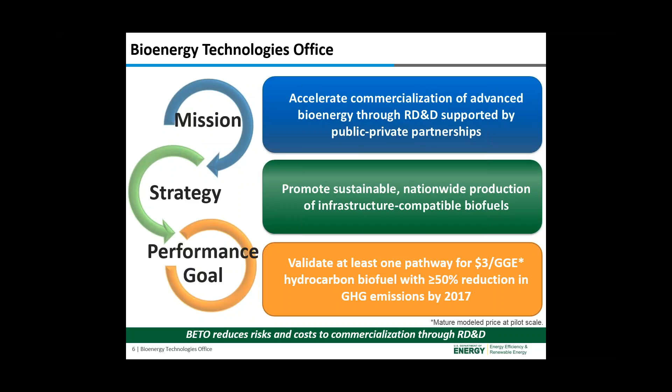So BETO's mission is to support the research and development and demonstration of advanced bioenergy technologies. Our office spans the entire bioenergy supply chain. So feedstock supply efforts focus on RD&D to develop cost-effective integrated logistics systems. So this includes growing, harvesting, collecting, storing, pre-processing, handling, and transporting of quality feedstocks to biorefineries. Our conversion R&D program is focused on developing commercially viable technologies to convert terrestrial and algal feedstocks into liquid fuels, as well as bioproducts and biopower.

Biochemical conversion R&D focuses on pathways for producing sugars and other carbohydrate intermediates, followed by conversion to finished fuels. And the thermochemical conversion R&D is focused on pathways producing bio-oil and gaseous intermediates from biomass, followed by upgrading to finished fuels. And then another category we have is the demonstration and market transformation program that is focused on demonstrating and validating biomass conversion technologies through successful construction and operation of cost-shared pilot and demonstration scale integrated biorefineries.

We also have cross-cutting programs in sustainability and strategic analysis, which proactively addresses sustainability of advanced bioenergy to enhance its benefits, public acceptance, and long-term viability. This program area conducts key analyses to guide planning and portfolio management and provides analytical basis for the R&D prioritization of target development and assessment of progress towards goals.

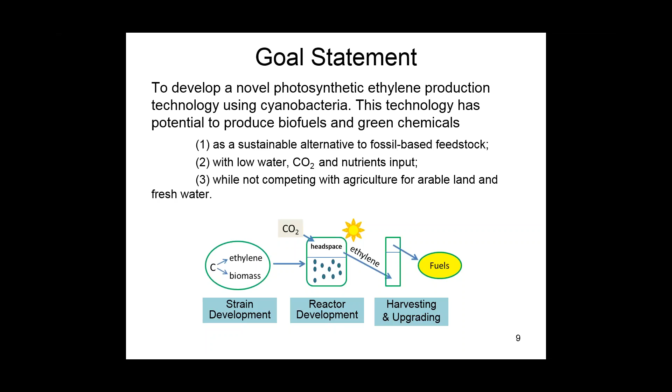So why are we working with cyanobacteria? Cyanobacteria are also known as blue-green algae. They are bacteria that perform oxygenic photosynthesis, converting carbon dioxide to organic compounds. They are primary solar energy converters in diverse ecosystems.

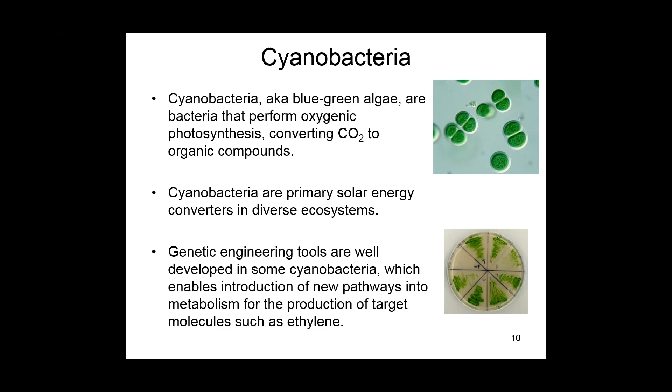They are very robust. And for some strains of cyanobacteria, we have excellent genetic engineering tools that allow us to modify its metabolism to introduce new pathways, produce useful products, such as ethylene, and that allow us to further improve metabolic pathways to make more ethylene. Next.

So why ethylene? Well, ethylene is one of the most produced organic compounds worldwide. It is the feedstock for a wide range of materials and chemicals that include all kinds of plastics. Ethylene can be polymerized into liquid transportation fuels. And currently, at industrial scale, ethylene is produced from fossil resources. So I want to point out that the fossil resources are organic compounds that are derived from photosynthesis that occurred millions of years ago. So more renewable sources of ethylene are desirable. Next.

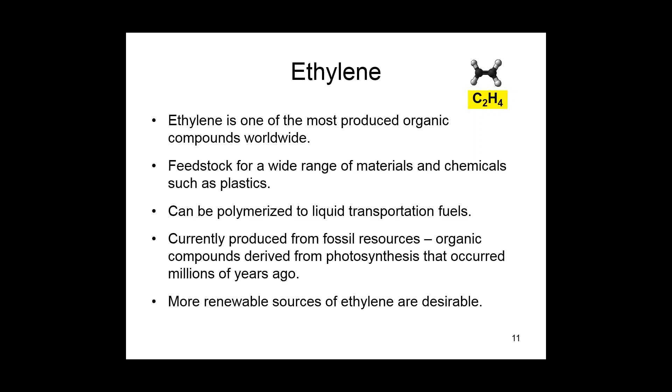Here we look at different ethylene production scenarios. So on the left is the conventional fossil resource-based ethylene production. In the middle is a newer plant bioethanol-based approach. And on the right is what we're working on, cyanobacteria bioethylene.

So in the conventional ethylene production approach, here we show that we start with petroleum, and that's long-chain hydrocarbons. And petroleum can be steam cracked, processed to produce a mixture of short-chain hydrocarbons. And by cryogenic distillation, you will get ethylene and other chemicals.

So in the plant bioethanol approach, first you grow a plant, and that's a CO2 fixing process. So you get plant biomass, and then you process the biomass, and you get ethanol by fermentation. Then by a catalytic dehydration process, you can get ethylene.

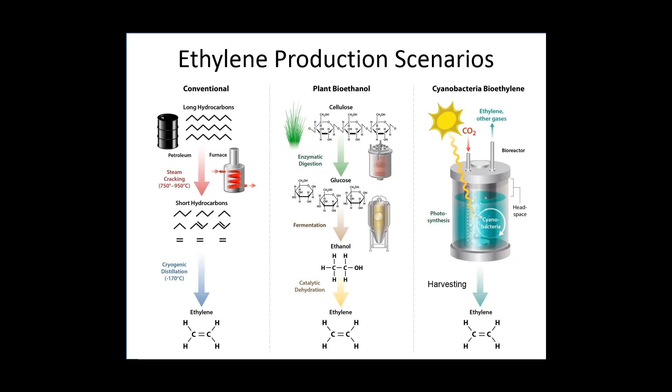On the right is a cyanobacteria bioethylene scheme. What's shown here is an artist rendition of a photobioreactor that has cyanobacteria in it. The cyanobacteria would accept solar energy and fix carbon dioxide and produce ethylene and oxygen. So in this process, the absorption of carbon dioxide and the production of ethylene happens simultaneously. Next, please.

So coming back to the point that all the carbons in ethylene ultimately come from photosynthesis. So in the conventional ethylene production process, the photosynthesis happened millions of years ago, and then the biomass was turned into fossils. And now we dig it out, we process it. So what we are getting is the carbon that was fixed by photosynthesis millions of years ago.

In the middle, in the plant bioethanol approach, you grow plants, they absorb CO2, and then you process the biomass, you get ethanol, and then convert that into ethylene. So this takes at least one growth season, that will be months. And in the cyanobacteria bioethylene production scheme, CO2 is directly converted by cyanobacteria to ethylene. So this is a real-time carbon conversion process. Next.

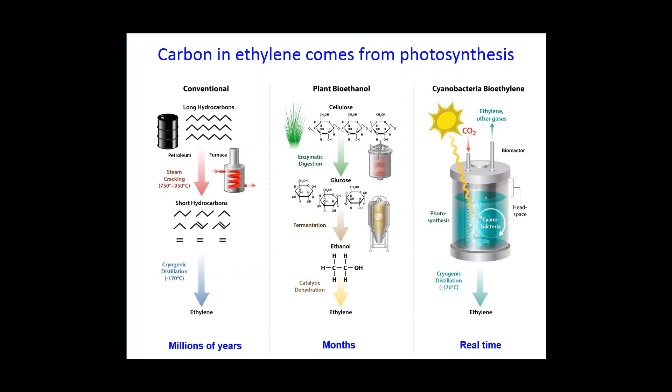Now, what normally happens with the cyanobacteria, in this case, I work with the strain called Synechocystis 6803. So what this wild-type organism normally does is photosynthesis. So it takes solar energy, it absorbs CO2, it uses water. And photosynthesis produces oxygen that comes out, and the organism makes more cells. Next.

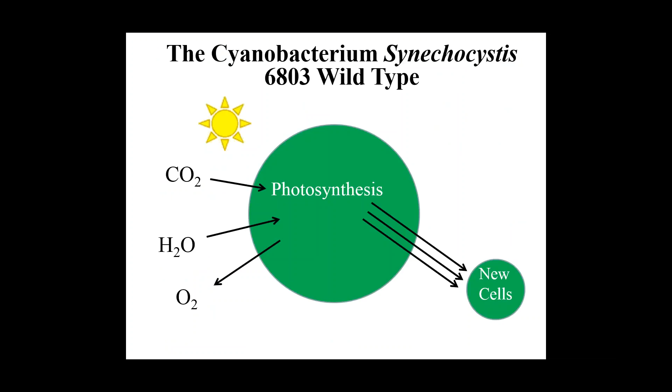To make the organism produce ethylene requires introduction of a single enzyme called EFE, or ethylene forming enzyme. So now, where does this ethylene forming enzyme come from? Next.

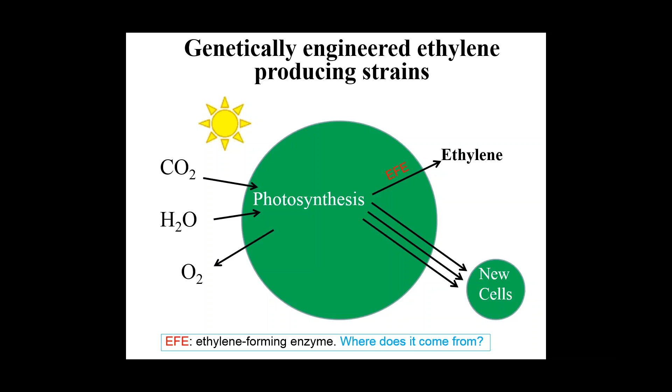So the reaction is not really well understood. There's no protein structure available. How this reaction happens is still under study. So some of the background is summarized in a review that we published more than a year ago, at Biotechnology for Biofuels. Next.

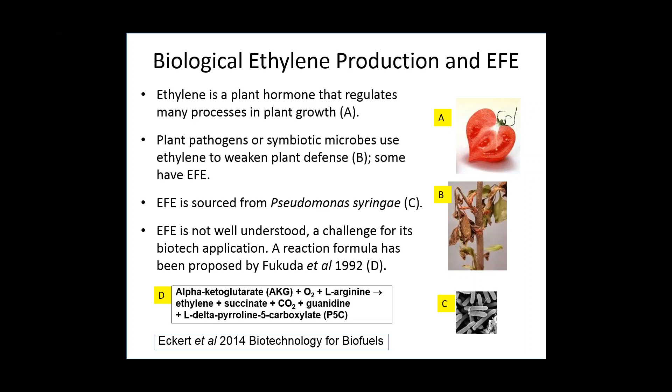Now, before we got serious about making ethylene using cyanobacteria, we want to make sure that this product will not be toxic to the organism. So we did some tests. So we added ethylene, and it didn't inhibit any growth. And then we started to generate ethylene producing strains. So they make ethylene and the growth was not slowed down. So we conclude that this product is not toxic to the organism. So that's great news.

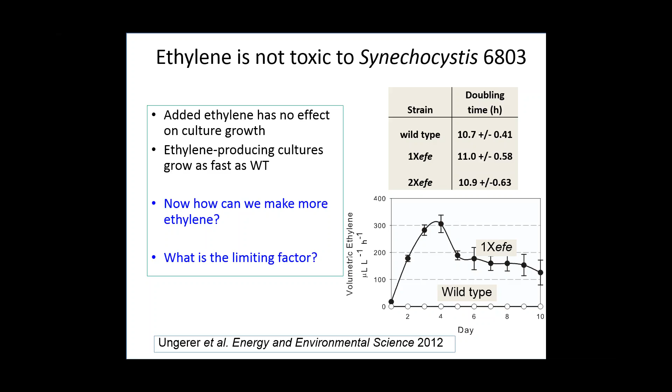So now we can make some ethylene. Now can we make more ethylene? So the question is, what is the limiting factor? So a lot of this is published in 2 papers. The first paper we published in 2012, that's shown here, in Energy and Environmental Science. Next.

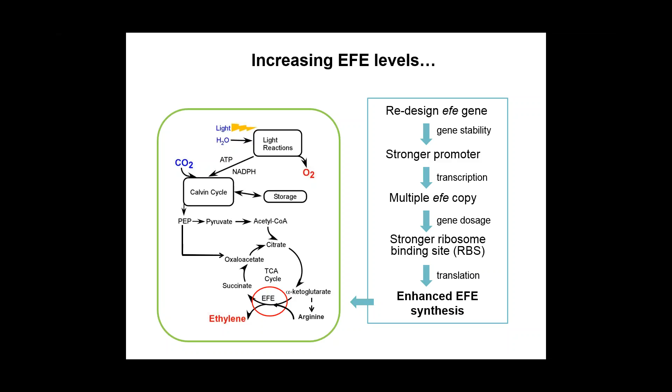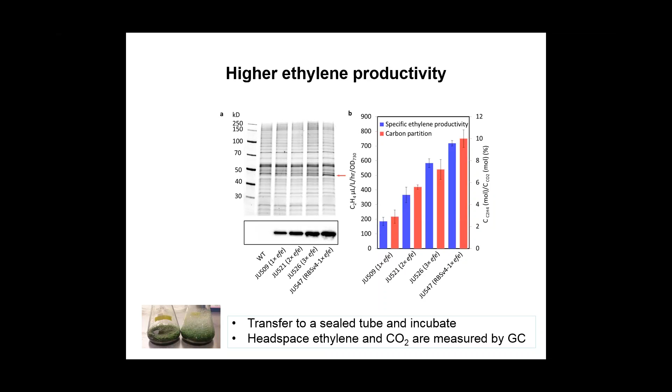So when we measure ethylene productivity, see there are 2 flasks there, and there are lots of bubbles. The bubbles contain oxygen and ethylene. And when we do the measurement, we transfer a small volume of the liquid to a sealed tube and incubate for some time. Then we measure ethylene and CO2 from the headspace using gas chromatography. Next.

So that experiment was done in the BG11 synthetic medium. And so here we try to test whether we can grow algae and produce ethylene using seawater, because that's going to be a huge advantage. And this data was published as well. The conclusion is seawater can support the growth of the organism and ethylene production if we supplement that with nitrogen and phosphorus nutrients.

And those nutrients happen to be rich in wastewater. So it may be possible in the future to use seawater for ethylene production and recycle the nitrogen and the phosphorus from wastewater. Next.

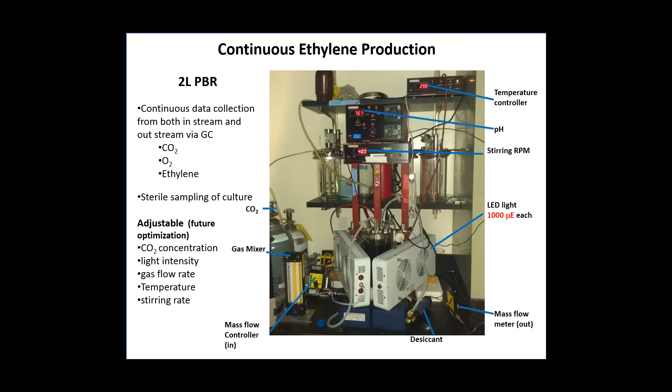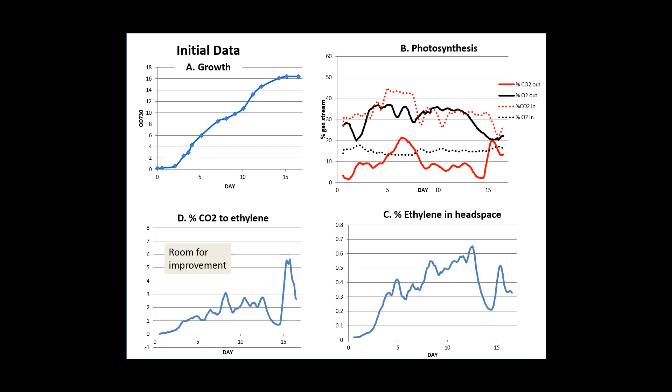So we took a deeper look into metabolism, and we tried to understand how ethylene production incorporates into photosynthesis, and how we can improve it. But then we found quite a few surprises. That was published last year in Nature Plants. For details, you can go to that paper, but some of the conclusions are here. In wild-type cyanobacteria, the TCA cycle doesn't really operate as a cycle. And in the ethylene production strain, the TCA cycle does operate as a cycle. And the carbon flux into the TCA cycle increased 3-fold.

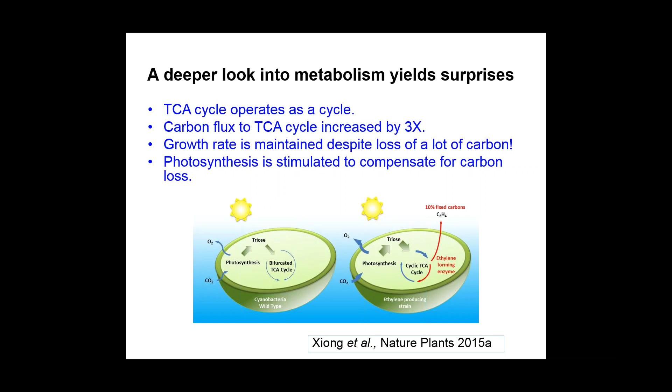So the organism is making a lot of ethylene, and it's also losing CO2 by the ethylene-forming enzyme. But what was surprising was that the growth rate was maintained. So although the organism is losing a lot of carbon, it grows as fast as wild type. And then we took a look at photosynthesis. We found that photosynthesis is stimulated. So the organism is now taking in more CO2 to compensate for loss by the ethylene-forming enzyme. So that's very interesting. There must be a mechanism that regulates the rate of photosynthesis. And that mechanism is now altered in the ethylene production strains. Next.

So some of the data on photosynthesis are shown here. What's shown on the left is the light reaction parameters, including oxygen evolution and the chlorophyll content. And both are increased in the ethylene producing strain. What's shown on the right side is the carbon metabolism parameters. And we saw that the Rubisco activity is increased. The carbon partitioning into the TCA cycle is increased by 3-fold. And the CO2 fixation rate is also increased. Next.

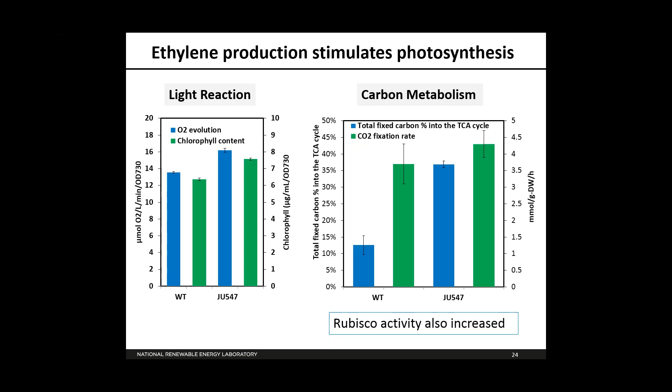So some conclusions from the work we have done so far: a cyanobacterium has been genetically engineered to convert carbon dioxide to ethylene. And so far, up to 10% of fixed carbon is directed to ethylene. The initial rate-limiting factor was the ethylene-forming enzyme itself. And more recently, as we improved ethylene-forming enzyme activity, the substrate supply has become the rate-limiting factor. In parallel to this research, we have done some ethylene production study in E. coli, and we have recently published a paper in Biotechnology for Biofuels that shows the strategy we use to overcome this limitation.

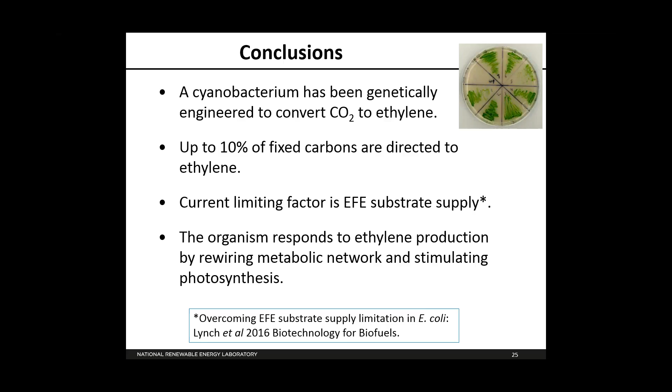So the cyanobacterium responds to ethylene production and loss of carbon by the EFE enzyme by rewiring its metabolic network and stimulating photosynthesis. And that's quite interesting. Next. So clearly we have a lot of work to do. On the strain development side, we would like to increase carbon conversion efficiency from up to 10% towards 90% using synthetic biology approaches. The rate-limiting factor is now the substrate supply, so we are learning from our E. coli work to genetically engineer the substrate supply pathways.

On the reactor development side, we have just started to work on it. And we'll develop cultivation, production, and harvesting systems tailored for ethylene production. We're going to need some help there, either academic collaborators or industry. We've started to work on techno-economic analysis, and we plan to work on life cycle analysis in the future. Next.

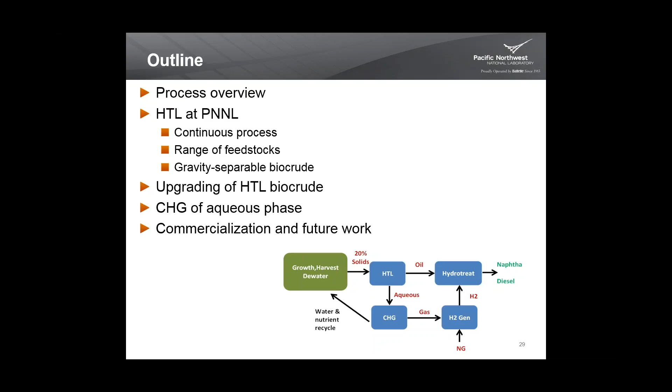I'll also talk a little bit about the upgrading that we do of the bio-crude product from the liquefaction step. It's catalytic hydrotreating to clean up the sweet crude really that's being produced in our case and make a low oxygen hydrocarbon material. I'll talk about the CHG, the catalytic hydrothermal gasification of the aqueous phase to clean it up and allow for recovery of the nutrients as well as the energy value of the organic material in the water. And then we'll finish with where we're going with this technology into commercialization. Next slide, please.

This technology isn't brand new. It has been under development in this laboratory off and on since the beginning of my career here. So there was actually a plant built in the 1970s after the first oil crises that was operated into the early 1980s, and it's pictured here. This technology was analyzed and passed over in favor of fast pyrolysis because it was really looked at only from the point of view of making a fuel oil product. And you can see from the flow chart here, it's rather complex.

To work with wood actually required an acid hydrolysis to break the wood down so that it could be pumped as a slurry and try to generate higher concentrations of biomass in water. Unfortunately, the liquefaction step is done more at a higher pH, so alkali addition was required then to neutralize the acid as well as provide the catalyst, which functioned in combination with the syngas, the carbon monoxide hydrogen that you see being added, and a kind of complex chemistry based primarily on formate reduction to convert the oxygenated biopolymers into the bio-crude product.

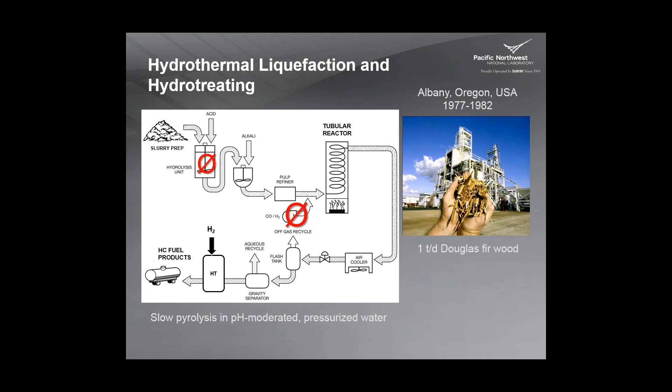And this is a very significant difference in how we look at this technology and how we use it today compared to back in the 80s, when this plant pictured was shut down and the technology was basically abandoned. Next slide.

So what we are talking about is processing at high temperature and pressure, about 350 degrees Celsius, just under the critical point of water. So it is still a liquid water moderated environment. It requires high pressure to maintain that environment. So pumping biomass into such a high pressure system requires the biomass be in very small particle sizes in slurries, as shown in the pictures here of wood and straws, that can then be processed in the high temperature environment to make it into a crude oil.

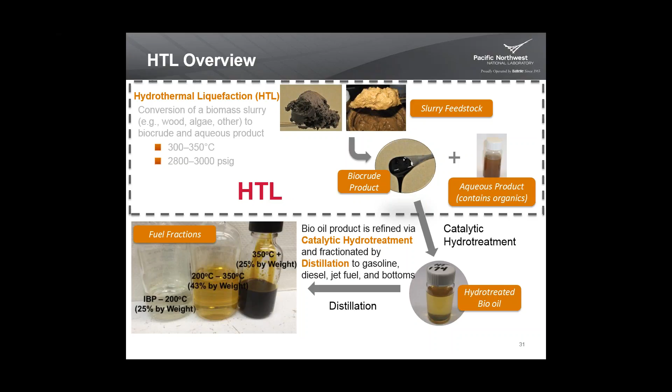There is this significant dirty water aqueous byproduct that comes out. There is carbon that goes in that direction. We do need to recover that to make an economical process overall. But we've shown now that we can take that biocrude, we can hydrotreat it through catalytic processing that is not all that different from well-known petroleum processes, and make finished hydrocarbon products that can be distilled, as you see in the lower left side: the light gasoline phase, a jet diesel phase, and then heavier oil products. Next slide.

As I mentioned, there are these range of products. There is an oil product. It is phase separated from the water, so it is the water insoluble portion that we work with and further hydrotreat. We don't do any kind of solvent extraction to recover, as is commonly done in small batch reactor tests that are reported in the literature. It is a more viscous oil than is produced in fast pyrolysis, but it still is fluid and can be moved and pumped through further processing systems.

It's a reasonable yield on a mass basis, varies depending on the particular biomass feedstock, anywhere from 25 to 50% on a mass basis, but more importantly on a carbon basis, it can be as much as 70%, and you'll see in some of the algae tests we've shown even up to 80% of the carbon ends up in the biocrude, this water separable biocrude product. Now, there also is still a small amount of water dissolved in these products because they are still partially oxygenated. They've been greatly deoxygenated compared to just a simple pyrolysis process.

We do produce a little bit of gas byproduct. This is primarily a deoxygenation step because the product is essentially carbon dioxide. It's not a major loss, but it certainly is a very significant step to removing oxygen from the biomass and getting us on the pathway toward hydrocarbon fuels.

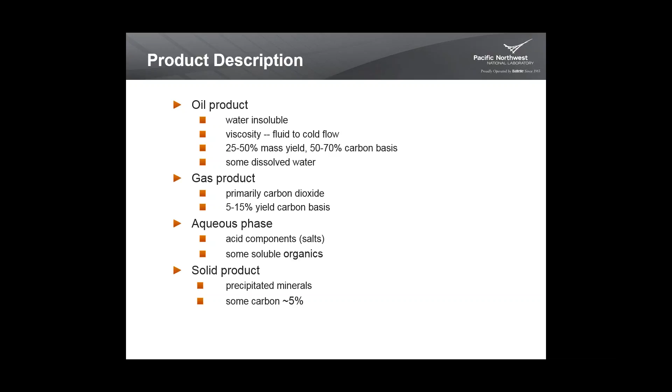Our focus of the research these days is to maintain a strictly plug flow operation. We found we can do that now by maintaining velocities at sufficient levels, and have taken really the stirred tank reactor out of the system. Engineering sense says to get rid of that unit. Tubular reactors are much easier to design, run, and operate, much lower maintenance from a processing point of view, much more reliable in the long run.

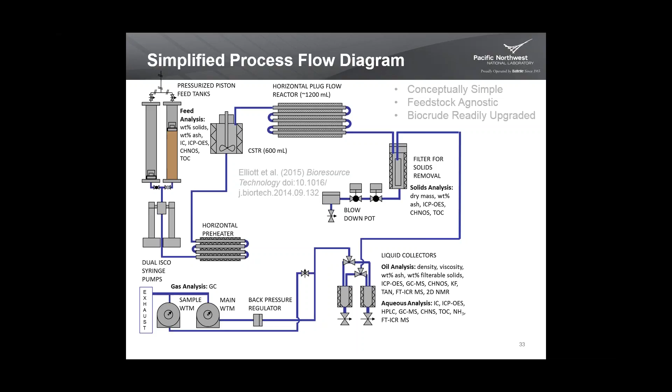But it is a relatively simple process in that we're basically pumping to high pressure, heating to temperature, letting the chemistry occur over some minutes, and then cooling it, separating it and cooling back down. Here you see the solid separation step. The liquid collectors then, once the mineral solids are separated, work very effectively for phase separation without emulsion formation, a key difference from other research out in the literature and other process technologies out there. And then finally we recover the gas products and analyze those to complete our mass balances. Next slide.

So I will give you just a hint of the different kinds of feedstocks and results we get. We have more publications out there if you care to follow up with those and get these details, but as I understand, these slides will be up after the seminar is over, and you can review those at your leisure. But you can see here we've worked with a range of lignocellulosics, all the way from pure cellulose through grass materials, even to wood. These can be made into pumpable slurries, ranging from 13 to 15% dry solids basis, and can be pumped and processed in our system. Next slide.

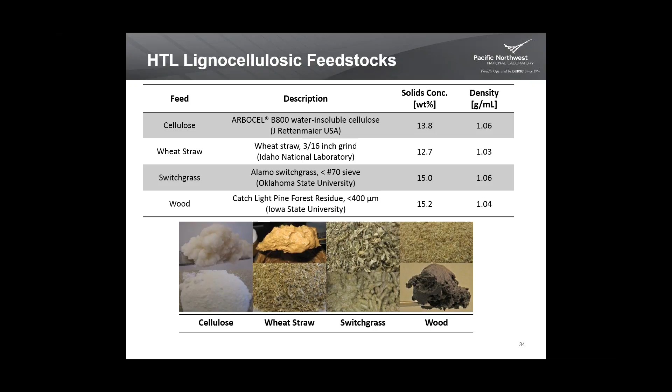The interesting thing is that converting of cellulose works almost as well as the other lignocellulosics, but in fact the lignin does seem to give a higher oil yield. The cellulose, of course, has almost no mineral and produces almost no solid byproduct, has a higher yield into the aqueous phase. But this whole range of wheat straw, switchgrass, and wood, you can see that the oil yields are similar in all cases. The product distribution is similar for these.

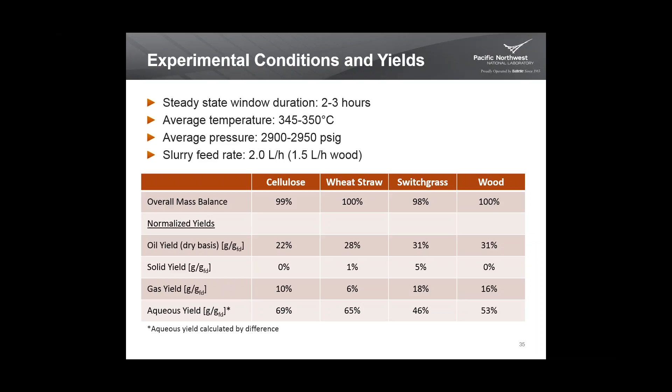Processing at a range here in this table shown as about 2 liters an hour. In fact, we're finding that we can push this even faster through our systems. Most recent results are showing 2 to 3 times the increase in the space velocity through the reactor with a purely plug flow system. Next slide.

These are for operations that last about a day, a long day, and we work for steady state operation on our continuous flow system and take operating windows and collect data from windows 2 to 3 hours long. Next slide, please.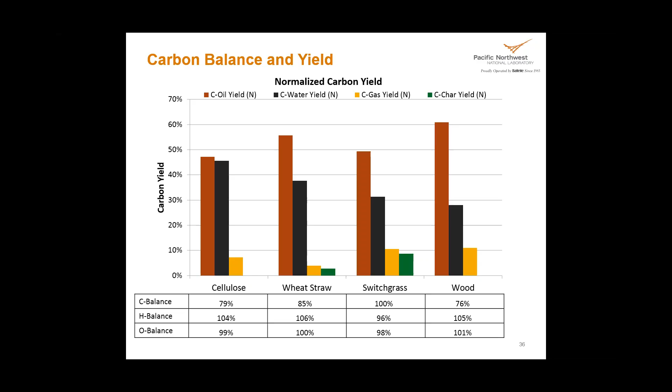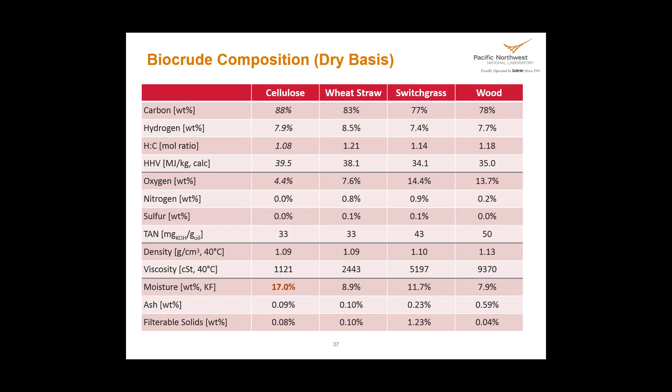We've also applied the technology to algae, and in this case, we find it particularly interesting to show how algae can be grown, and it needs to be concentrated. The item number 1 there, a dewatering system, recycles much of the growth environment back to the algae growing system to collect the solids. We don't need to dry it though in our system. We're still working with wet algae, typically around 20% dry solids. That can be accomplished with mechanical dewatering as opposed to thermal, so the energy input is relatively low at that point.

We do the liquefaction in step 2, and you can see in step 3 where we separate water and oil. The water carries nutrients, and solids also separate out and can be used to recycle back for more algae growth. The liquids go on to 4 where the oil and water separate. The catalyst is of course different in steps 5 and 6. It's a hydrotreating catalyst to convert the biocrude into the finished hydrocarbons. It's our special aqueous phase catalyst for gasifying the organics in the water stream to produce a methane CO2 product gas. Next slide.

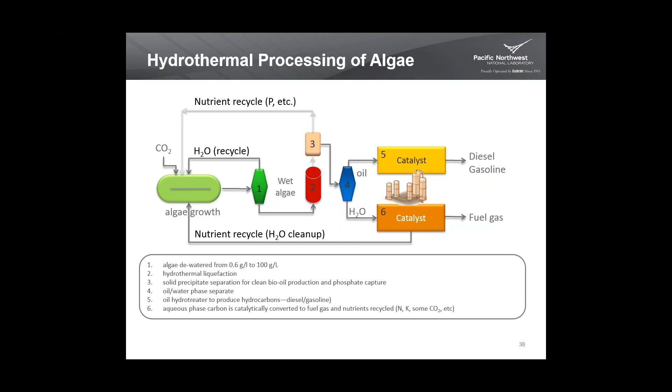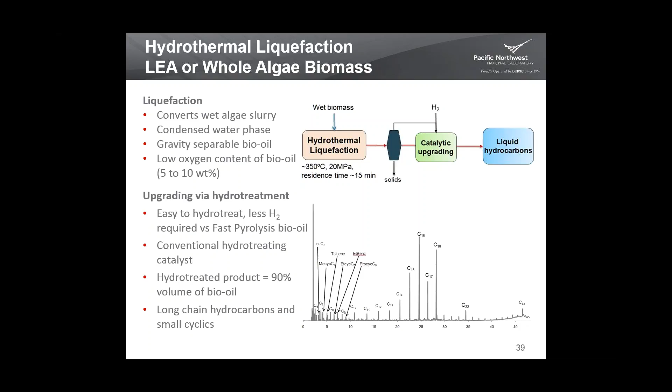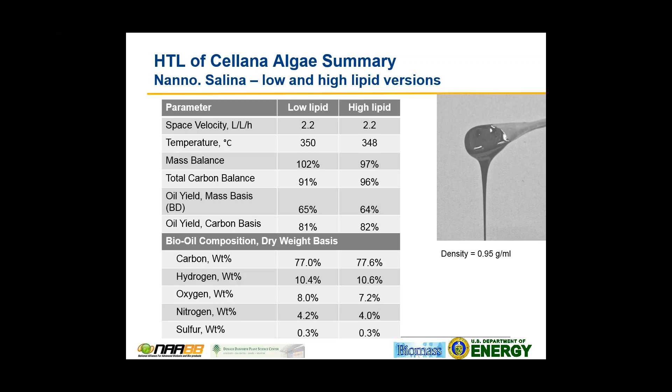And to underline this aspect, we actually did work with 2 strains of algae, one low in lipid, one high in lipid, same algae but just grown under different conditions. We showed that this biocrude product could be produced from either of these, whether there was a lot of lipid or not. Good oil yields, as you can see here, the high carbon yield of 80%, and making a biocrude not unlike the lignocellulosic in that it still has significant oxygen in it, but less than 10% in the algae case, but still the higher protein content in algae versus lignocellulosic shows up here, 4% nitrogen in the biocrude and a bit of sulfur. Of course, the hydrotreating, the upgrading, is where these final bits of oxygen, nitrogen, and sulfur are removed to produce a pure hydrocarbon fuel. Next slide.

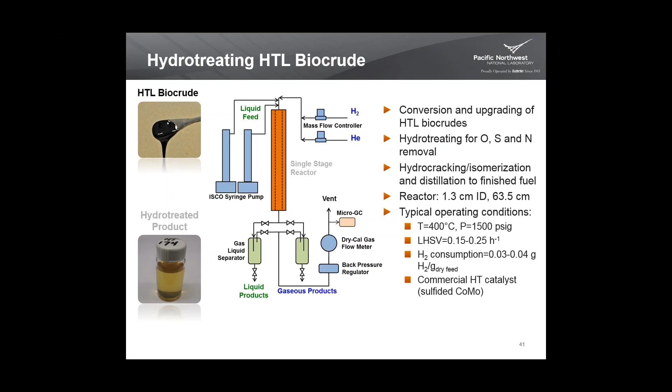We do full mass balance on these kinds of systems, so we know how much hydrogen is being consumed. We don't have to just base it on calculations and assumptions. We actually produce the data which allow for design of these systems at larger scale. And we're using conventional hydrotreating catalysts. These are sulfided molybdenum catalysts, cobalt or nickel promoted. We prefer cobalt promoting for most of our work. Next slide.

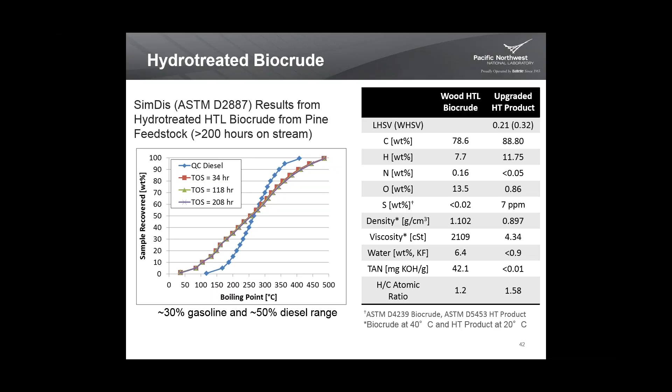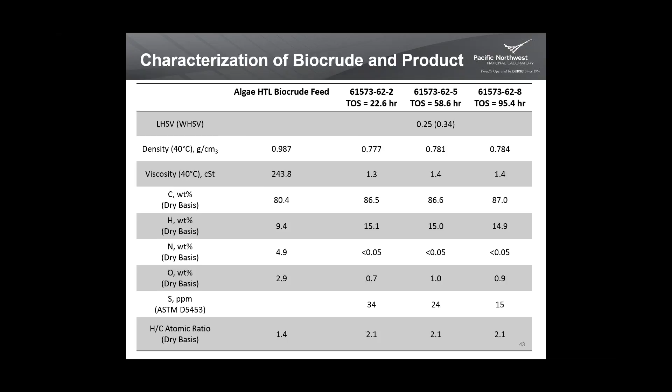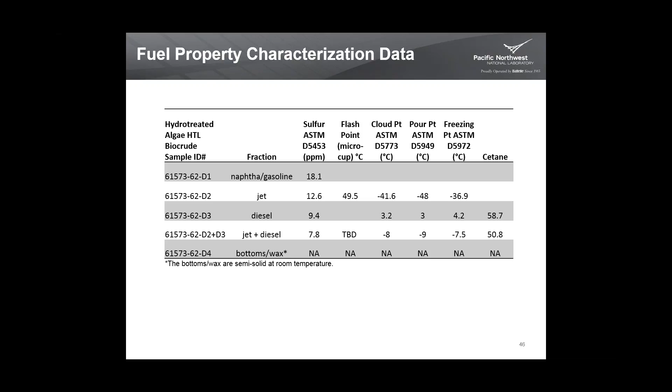And just finally, again, very detailed analyses are required to get to quality of diesel and jet fuels. Very low sulfur levels are required. The cloud point, pour point, freezing point data are key for operation with jet fuel, and these products have the right properties to be used in that fraction relatively straight away from the production out of our hydrotreating. Next slide.

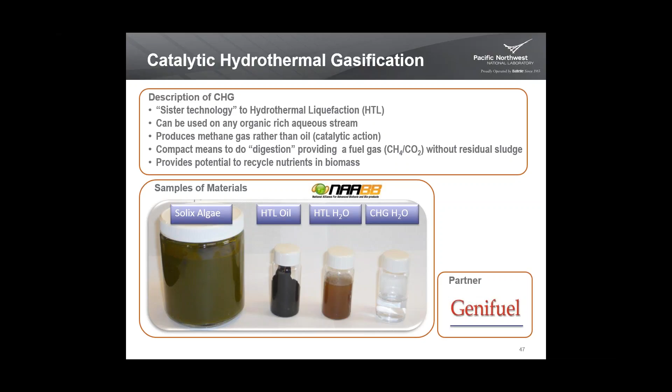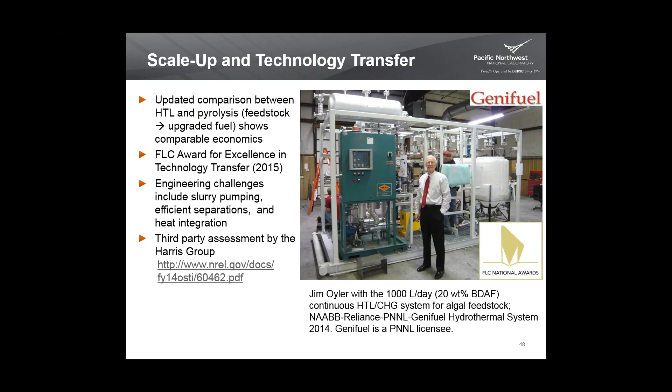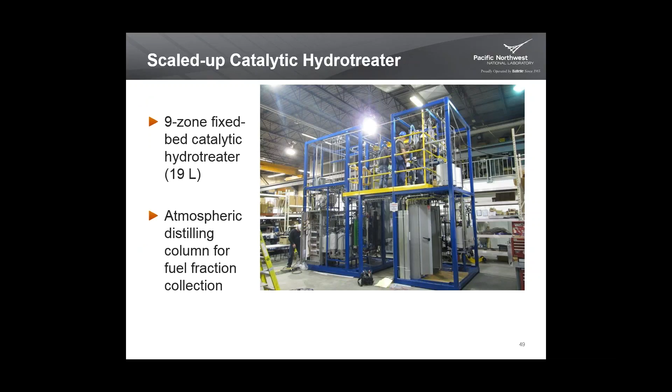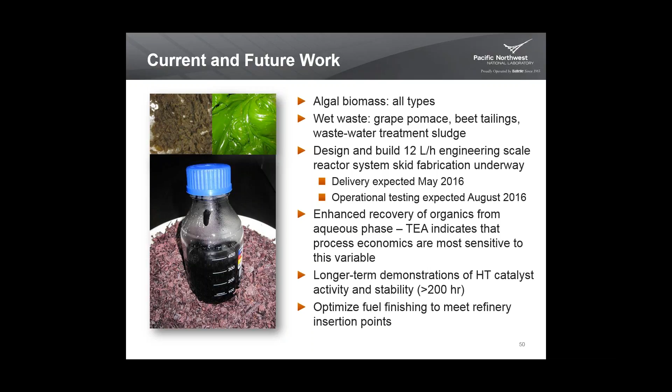Just showing that we hope to be making the finished products at larger scale. We have this scaled-up hydrotreater, which we hope to be running later this year to make larger quantities, gallon quantities of fuels for testing. Next. So we've worked with all range of wet biomass materials as shown here, from food waste to algae. We are building a larger scale version for further testing. Our economics have been studied and shown to be of interest. We're working to larger scale operations. Next.

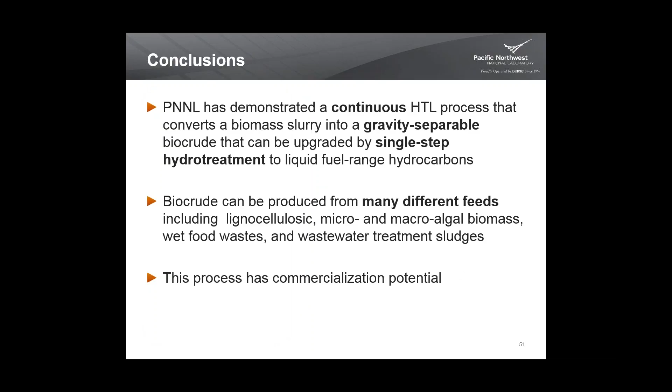So we have a continuous flow system. We make quality oil straight away. We can hydrotreat it to make finished products. We're looking at a whole range of feeds. So we think this is a very important development. We're pleased to be recognized. Next slide.

And as I said, there's a whole team of people at the lab. The people that were recognized on the award, but other operators in the liquefaction, the hydrotreating, the analytical people, the techno-economic assessment people, and life cycle analysis. All of these folks at our laboratory have contributed to where we are at on this and receiving this award, and I appreciate all of their efforts. And thank you.

Thanks so much, Doug. That concludes our webinar this afternoon. You can see how these two great projects and these two great teams are helping to support the development of sustainable, renewable energy alternatives, and we are very proud to have them as part of the BETO family.